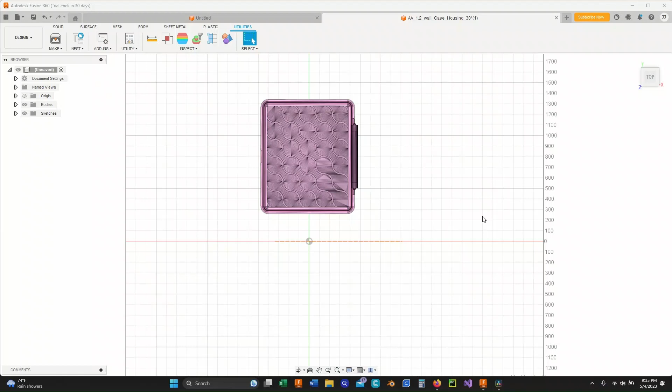In my previous video, I completely overlooked the fact that a lot of people probably aren't creating their own projects to put their name on. So I'll briefly show you how you can put it on someone else's project without converting it into a physical material, which would be save as mesh, or convert to mesh, which you can do.

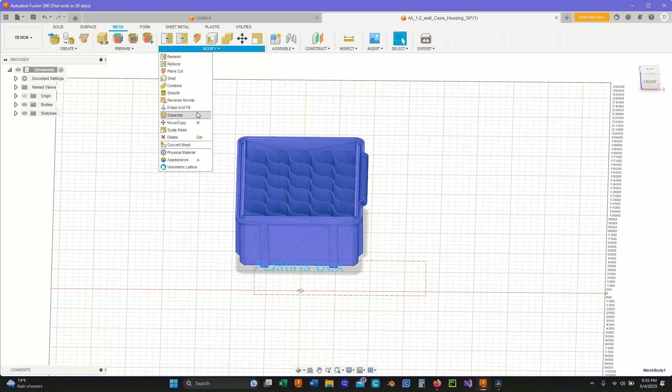If you have a strong, powerful computer, you go to mesh on the object you imported, then modify, and here's convert to mesh. This would convert it back to a solid, but as you can see with all of these vertices, that's going to take some processing power.

So let's say you want to put your name on something. I just got this box right here, Austin's box. You'll go to solids. After you do the text from the previous video, put it in, size it right, extrude the text.

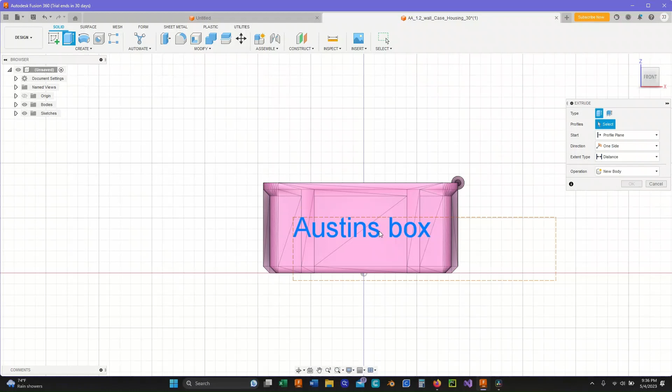We don't want it to go inside the box, right? So we'll say 12 millimeters, that should be good.

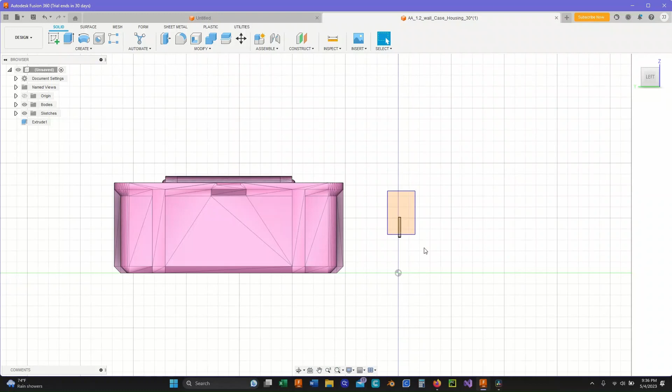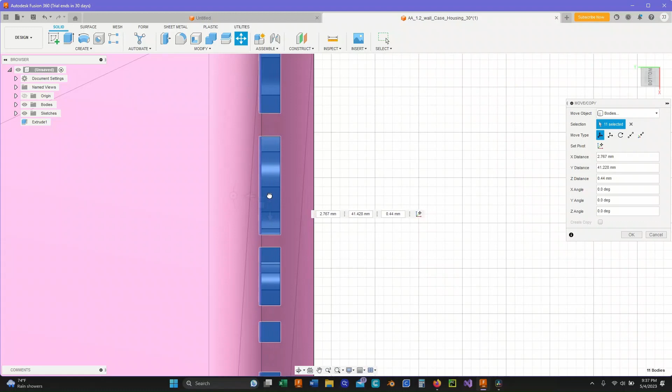Now from the left view, select everything you made, and you just want to put it inside the box semi-partially. We're going to have to extrude it just a little bit more. Let's look at it from the bottom, because we want it inside the box. So this would be inside, just starting to touch inside.

But we get letters covered because this part's bigger. So we could either make it smaller to fit in this portion, or if we just wanted to pop out even from these bumps in it, we would do another extrusion on all of these, or just the letters which need to be extruded.

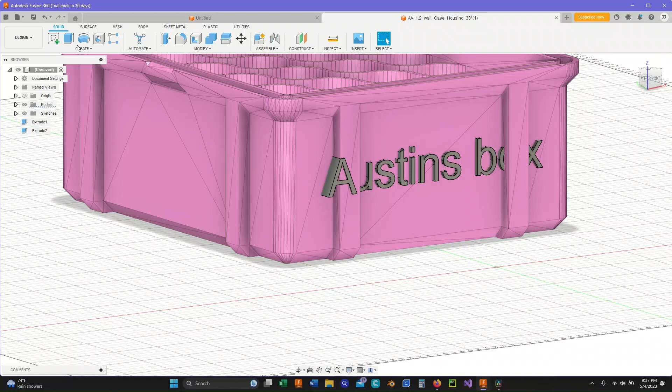So it's really as simple as that. Let me just do this one as a demonstration. I would actually recommend that you fit it inside of an area that's flat, but this will work just the same.

It just looks uglier and uses more material if you want it to fit around objects. So that's what it would look like. It's not the prettiest, so I would just shrink it down and fit it in a flat surface area.

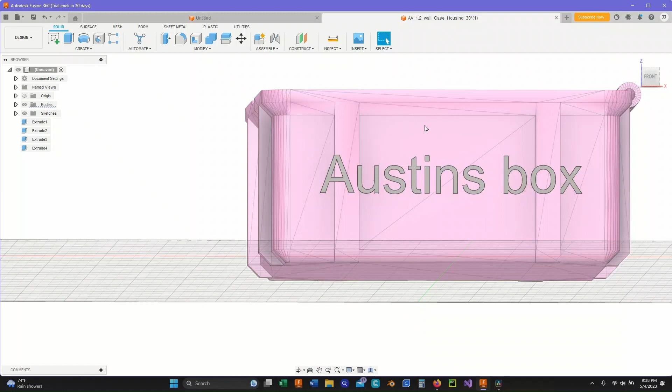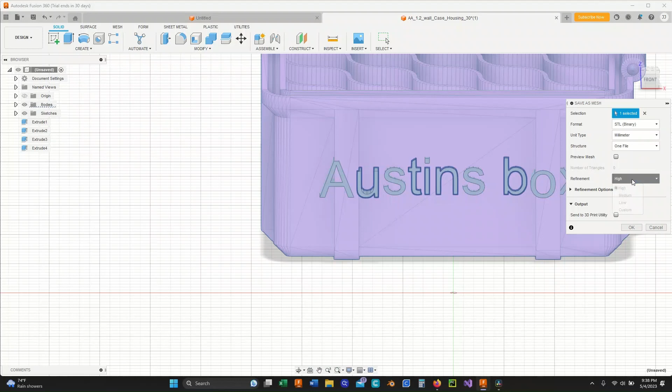Now that you have it where you want it, you're just going to click up here, right click, the very top of the drop downs on the unsaved, right click, save as mesh. You're going to save like this: STL, millimeter, one file, refinement high, so that it saves all the details.

And you just save it and save to computer. It'll save to downloads. I'll name it Austin's test box, or Avid Crafting test box, right? Save that. And that's as simple as it is.

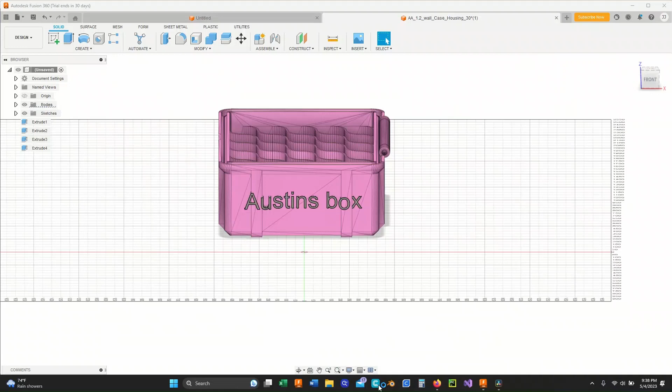So we're going to open up Creality, and I'll skip through until it opens. And here we are. I actually accidentally opened in my old slicer. I use Ultimaker now, but nevertheless, Avid Crafting box.

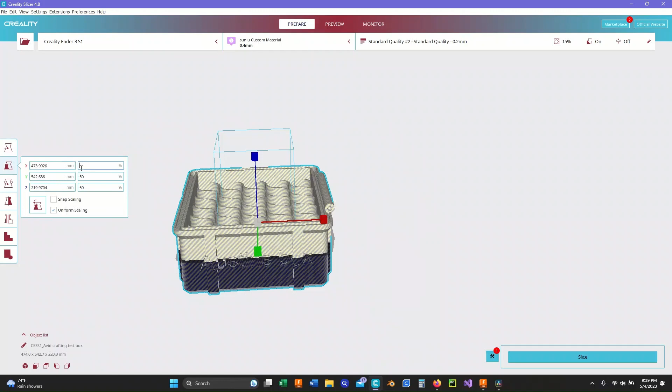It is massive, so let's just shrink that by 50%. Okay, let's call it 20%. And if you zoom in here, you'll see there's my name right there on the box. And that's as simple as it is.